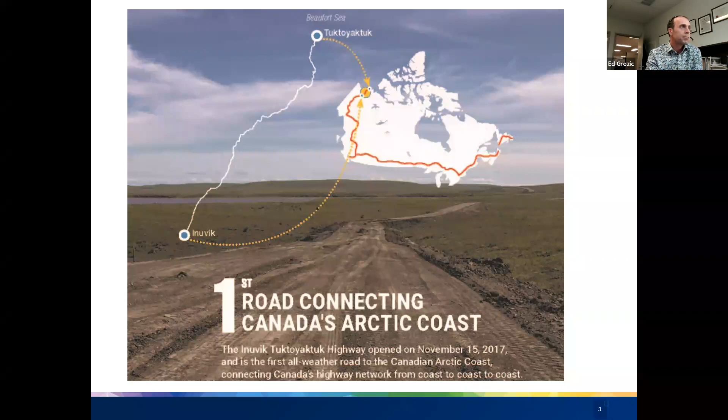Here's an aerial image of the ITH, its location geographically in Canada in the top left, and then the route between Inuvik and Tuktoyaktuk. The owner was GNWT, the contractor was EGT Northwind, and the design team was Tetra Tech and Stantec, through our indigenous partner companies, which is Kiggiak-EBA for Tetra Tech and Kavik Stantec for Stantec.

It was an entire team, dozens of people working on this project for many years. There was no one individual or small group, there were many. It was a negotiated contract, and the owner was pretty clear about their expectations: to construct a resilient, cost-effective gravel road.

They achieved that by engaging local contractors, but our role was to design a resilient, cost-effective road. The materials needed to be local, borrow materials, and materials available in this region between Inuvik and Tuk are pretty limited. Because this part of the world is a continuous permafrost environment, and the tundra is too soft and wet to work on in summer, this work was done between November and April in the winter months, rather than a May to October construction season like we'd have down south.

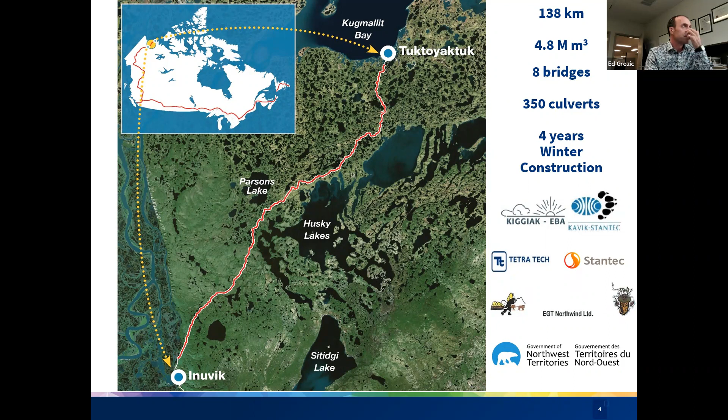In 2009, we undertook a field reconnaissance. I'll walk you through the stages of the project. We went from nothing, no direction, as a design team. We had to identify an alignment that could work for us, that we could construct with. So in the fall of 2009, we undertook a field reconnaissance program. We flew a line, broadly flying a region that Public Works Canada in the 1970s had identified as a possible route between Inuvik and Tuktoyaktuk.

From that, we worked with that routing and refined and re-refined and reworked a route that basically crossed the most favorable terrain conditions available to us, trying to avoid the least favorable permafrost and organic terrain conditions, and to find a routing where we could do a LiDAR survey on a corridor that we could then actually put a geometric alignment to.

There were a bunch of setback distances we had to meet for environmental reasons, setbacks from Husky Lakes, archaeological constraints, all sorts of considerations, and of course finding an alignment close to available borrow material was important as well.

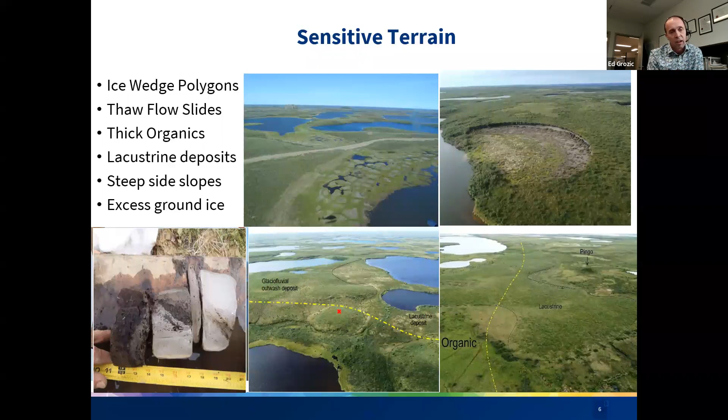Stuff we were trying to stay away from in the field, quite common in periglacial permafrost environments, is the ice wedge polygonal terrain you can see in the top left. This part of the world has retrogressive thaw flow slides, shown in the right image. Lacustrine deposits are pretty widespread near Husky Lakes and close to the Beaufort Sea. We were also trying to stay away from steep side slopes, and from excess ground ice in soils. But in this part of the world there's a lot of excess ground ice in the soils, as we found through investigations, which I'll speak through.

So what's excess ground ice? When I refer to excess ground ice, some people call it ice rich, but it's ground with excess ice. And what does that mean?

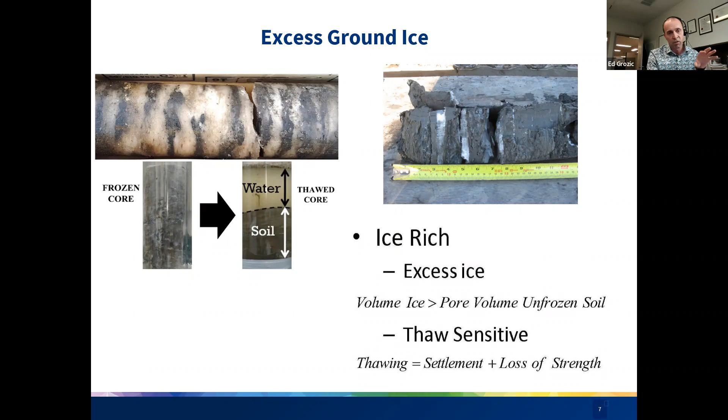Well, when that frozen mass of ice and soil thaws, what happens? The solids separate from the water. This image is just illustrative of what happens in that case. So it's a very thaw-sensitive material. Obviously, when that material becomes saturated or super saturated, there's a loss of shear strength, there's excessive settlements. So the design team in this part of the world worked hard to try to keep this material frozen, since it's strong in a frozen state and very weak in a thawed state.

A bunch of terrain mapping. Once we knew a general route and identified a corridor, then detailed terrain mapping was undertaken, and this took a lot of effort. This detailed terrain mapping was then used to target what we considered the most favorable terrain units for this road alignment that we had to work with, and we also used it to put a geometric alignment on.

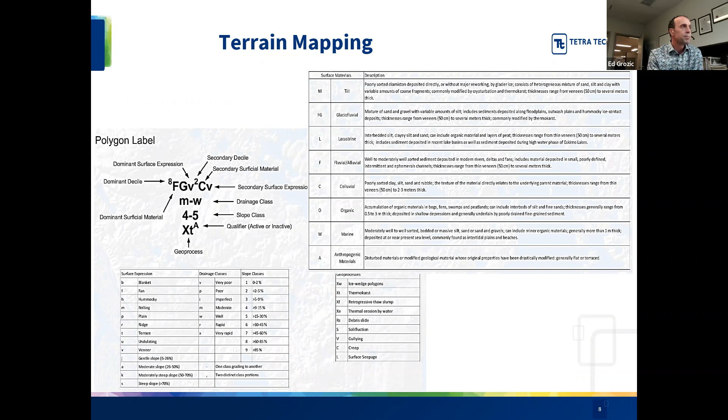But when you put a road geometric alignment down onto that terrain mapping, it didn't always align with the most favorable terrain, and there are certain sections of the road that had to cross unfavorable terrain. We were aware of it, and then we had to design accordingly for it.

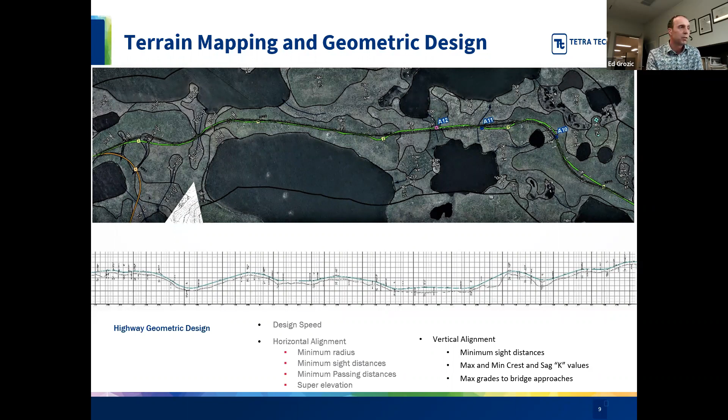Geotechnical investigations were undertaken over 2 winter seasons, and because this is a remote location, there was no communication or connection between Inuvik and Tuktoyaktuk on land. It was formerly via an ice road. This was done between February and March, and just compacted snow roads were used, with nodwells and other track carriers.

Pulling equipment or trailers on sleighs, like you see here, were done. We started in February and March because we started to get a little more daylight hours. Trying to do work in December and January is very difficult, and there are a couple of months there with no real daylight, great daylight hours. So it's more favorable to start a drilling program in February and March, and sometimes occasionally work into April.

Part of the investigation was looking at borrow material, which we knew we needed to construct a road. Almost 5 million cubic meters of material was required to construct the embankment, and no geophysical surveys were done at the time. 10 years later, we'd probably undertake some geophysical surveys, but it was just a detailed conventional drilling program.

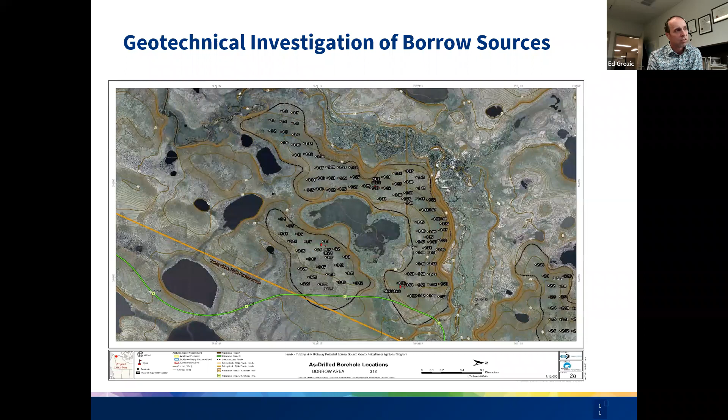We also undertook geotechnical investigations at stream crossings and along the proposed alignment to better understand what the subsurface conditions were, what the ground temperature conditions are, and to better understand the stream crossings, whether we were dealing with talik or what sort of subsurface condition exists.

What we found consistently through these 13 stream crossings is we found consistently a silty clay material, and it was ice rich. The silty clay material was dominantly till from a depositional history environment. It was a till, but it was quite ice rich, and it was fine grained, and most of the crossings encountered that.

From this geotechnical investigation that we collected at the crossings and along the road alignment, we started to develop what I would call soil profiles in support of being able to do thermal analysis. I'm stepping through these different processes, but we had to understand what the subsurface conditions are. We know it's going to be variable along 140 kilometers of road, but we still needed to develop some typical profiles that we can use in thermal analysis and in design, in stability analysis and the other design that still needed to happen.

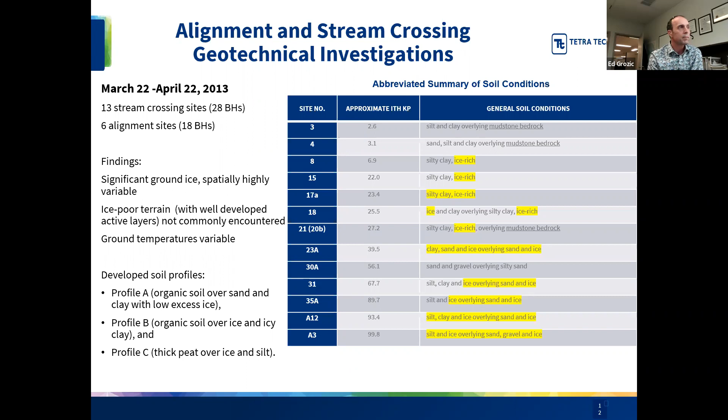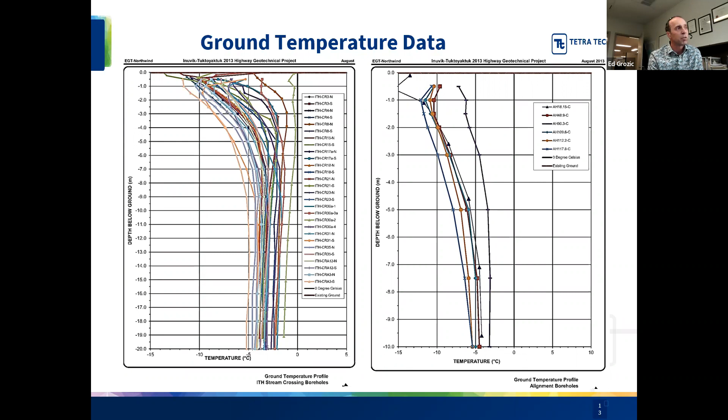The ground temperatures, as you would expect, got colder from south to north. We also collected some ground temperature data along the alignments, separate from the stream crossings, which supported the same finding.

We were mindful of the fact that steepening side slopes would be more favorable in terms of reducing material quantities, while shallowing the side slopes gives a more stable embankment but a larger footprint and greater material quantities. All that work of optimizing the right embankment for the right terrain conditions was still ahead of us.

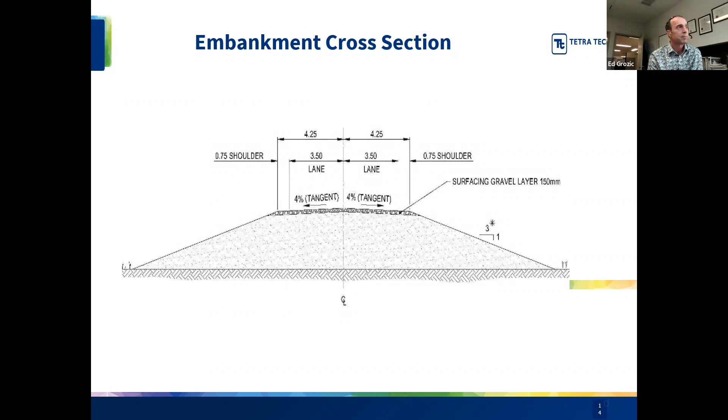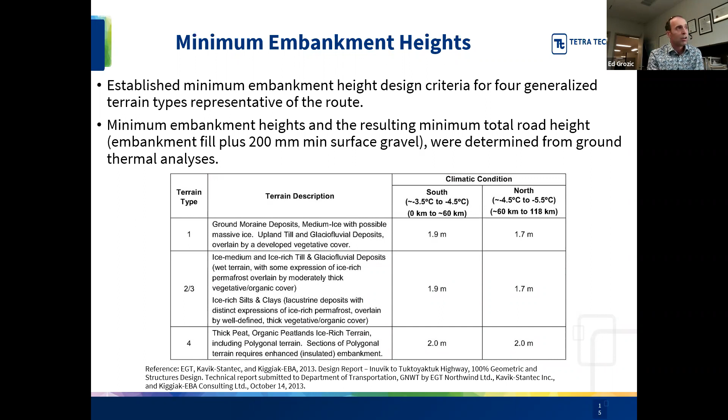Part of the geotechnical design considerations for constructing this embankment was not just the subsurface soil conditions, but also the embankment fills, and the two are interconnected.

So we did some parametric stability analysis looking at embankment fills, not just the height of fills, but height of fills on cross slopes, and how much of a cross slope we could put a road on that would still be stable, and what would be the maximum cross slope we could place the embankment on.

What is the maximum height we could construct? We weren't interested in necessarily maximizing embankment height, because that took more material volume, but geometrically sometimes the road required higher embankments just to get through depressions and deeper areas.

We looked at varied subgrade conditions and how the embankment would perform on these variable subgrade conditions. But if we're able to construct a thick enough embankment and maintain the permafrost at around the original grade, then we assumed the frozen subgrade would be more rigid than the embankment materials itself.

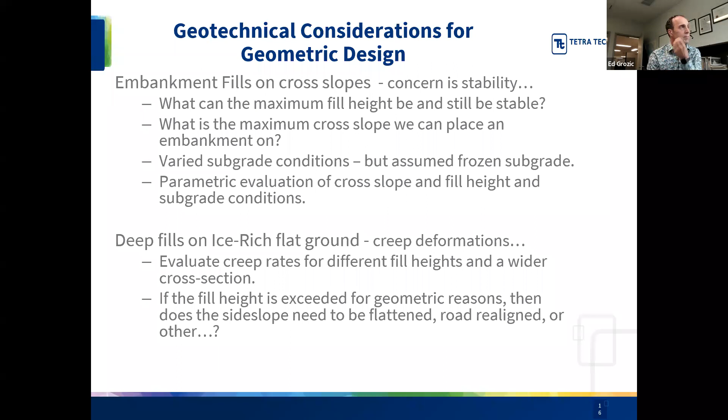Stability analysis was pretty comprehensive and looked at many different scenarios. We were interested in understanding how high of a fill we could construct. We ended up determining that a 5 meter thick fill with 2-to-1 side slopes generally worked from a stability perspective, unless the subsurface conditions were too soft and the strength wasn't there.

With a frozen subgrade, a 5 meter embankment with 2-to-1 or 2.5-to-1 side slopes worked just fine. We did some parametric work to try to steepen up the side slopes to reduce fill quantities, because if fill heights can be reduced, the likelihood of failure decreases and maintenance requirements decrease. Higher fills are just fundamentally more work to construct and maintain.

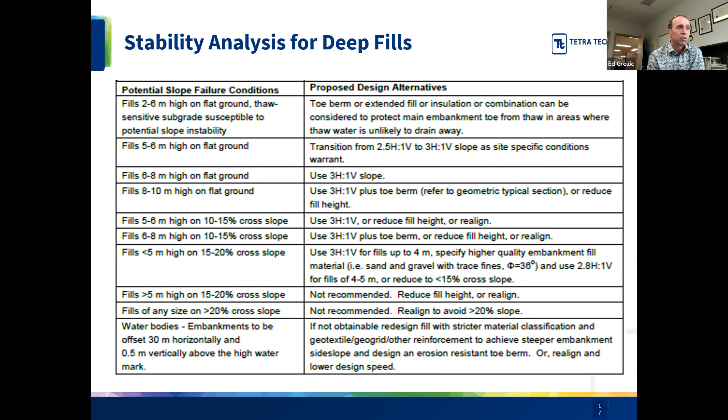The work was done in winter, so everything had to be drill and blast, and then the frozen materials were hauled to the alignment. The material dominantly in this part of the world is a silty, fine to medium grain sand. There was one borrow pit, 312, that had nice sand and gravel, which would be the optimum material for the embankment as a whole, but the haul distances were just too great to go from 312 all the way up to the north end or all the way down south.

So from a construction cost perspective, the road embankment was constructed with generally the closest available material sources. A couple of the sources were only actually accessible in the winter months from lake ice. You can't see it in this image, but PW10 requires crossing the lake between the alignment and the pit, and GSC 4 requires crossing another lake, Jimmy Lake, to get to the pit from the road alignment.

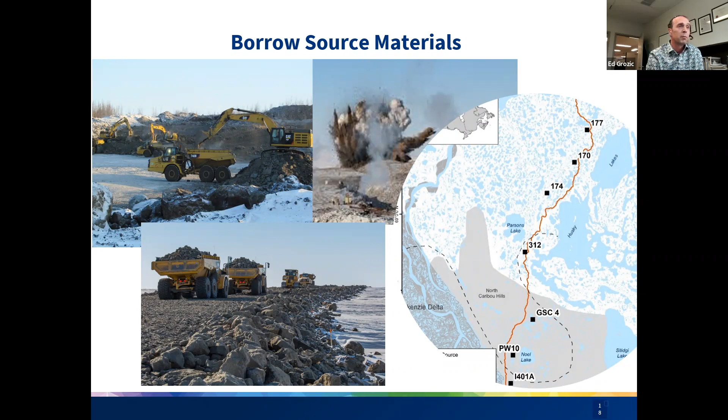Variability of material sources was another challenge. We know what materials ideally we want to work with, but then there's the materials that you have available to you to work with. Every pit was a little bit different in its gradation, and within the pit, there was a bunch of variability.

So for the pits, and for the project as a whole, we had to understand and rationalize what materials we were going to use, and how we were going to undertake quality control in terms of what was acceptable and what was not, in order to give the contractor direction on what they would be permitted and not permitted to do.

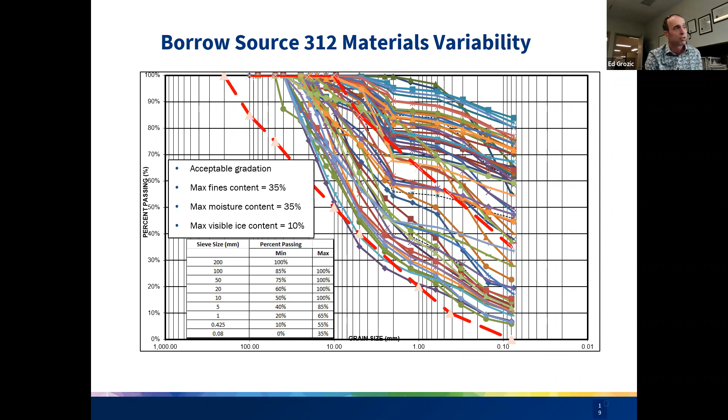There was some good work done in the early 1980s on the compaction of frozen soils by Botz and Haas, through the Cold Regions Research Engineering Laboratory in the US. It's a good special report, and we used it and worked with it because we needed to understand what sort of densities could realistically be achieved under winter construction, and what were the big factors influencing the density you can achieve in winter conditions.

We recognized that earthwork in this job, but on most projects, is a critical part of construction, particularly for winter construction. We understood excavation, and that we could excavate rock in the summer or winter, and that we can drill and blast and excavate frozen soils in the winter. But it's the placement of the soil in a winter environment that's very restrictive and difficult, and that's what we wanted to better understand. We knew that it's not possible to compact to the same density in winter as in summer, which is why conventionally down south we don't place soils in winter freezing conditions, or we hoard material or do some other activity in order to place soil in an unfrozen state.

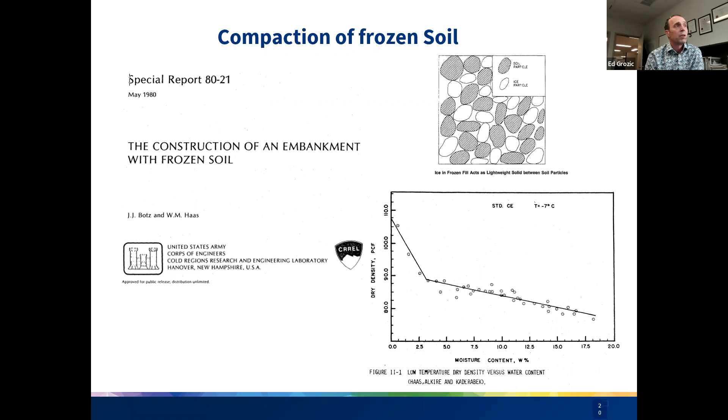In this case, it doesn't show up, but we also placed a non-woven geotextile separator between the embankment fill material and the tundra. Like I said before, all the construction happened in the winter months.

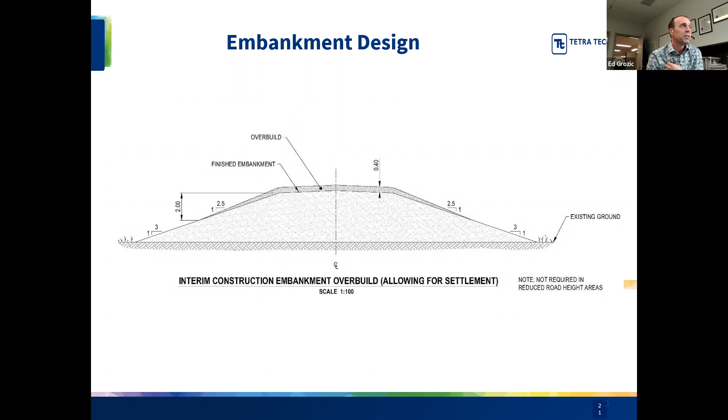Some photos to illustrate the work that happened in the winter months and how we tried to maximize densities in the field with frozen materials. The work done by CRREL and our own work showed that if we took blasted material and placed it in thin lifts, sheared it into place, and further crushed the frozen particles—even though they're ice bonded with ice crystals within the soil—if we're able to shear it in place and compact it...

...with, in this case, a sheep's foot vibratory compactor, 10 ton, we did this in lifts building up. This was the way we were able to achieve the best in-place densities of the embankment, which was of course attractive to us: the higher the density, the less the thaw settlement we were going to get in subsequent years.

This is an example of the material being spread and the sheep's foot roller going back and forth, and of course this is the pattern. Everything was passed with a minimum of 4 passes. Lifts were started at a maximum 40 centimeter thickness and then packed down.

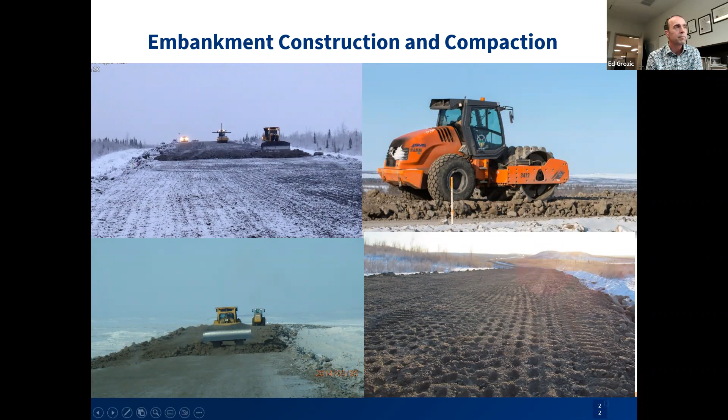In 2017-18, we were working with the GNWT to understand how much compaction and settlement we were going to get, and how much material we were going to use. The GNWT was interested in understanding volumes and costs, and also in doing some density testing of frozen soils. This work was actually done through the University of Calgary in 2017-2018 by 2 students. GNWT provided funding to the U of C to study the behavior of compacted frozen soils obtained from the ITH.

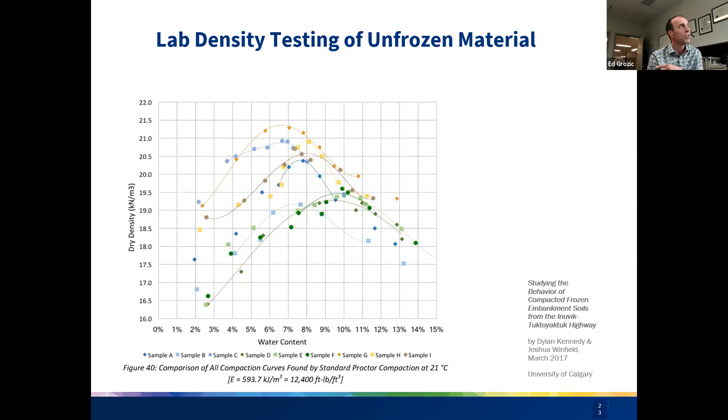We needed to understand how much loss in density occurs when you start introducing more moisture in the form of ice in the material. This work builds on the work that CRREL did in the 1980s, so we weren't doing anything novel here. We were just reproducing the work they had produced in the 80s.

We realized that even with further testing in the field, at optimum moisture content we were only able to get about 70 to 80% of the maximum dry density of that frozen material, which then supported the 40 centimeter overbuild that we estimated would be needed for the highway.

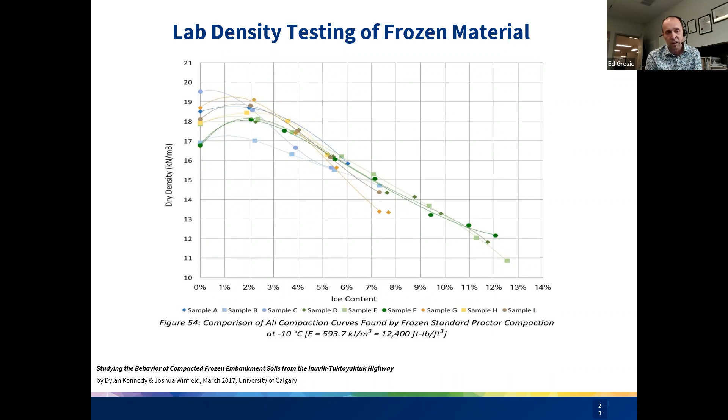At the end of the day, after 140 kilometers of highway were constructed, in some places the overbuild was sufficient, and in other places it was insufficient, meaning more settlement occurred, probably because either the moisture contents were higher or the in-place frozen densities were lower, a variety of factors.

There were different options that were looked at. Is it possible to mix concrete from a batch plant locally? Was that cost prohibitive? Is it more effective, which is what was done here, to just precast the concrete and ship it to site? So those different cost scenarios were evaluated.

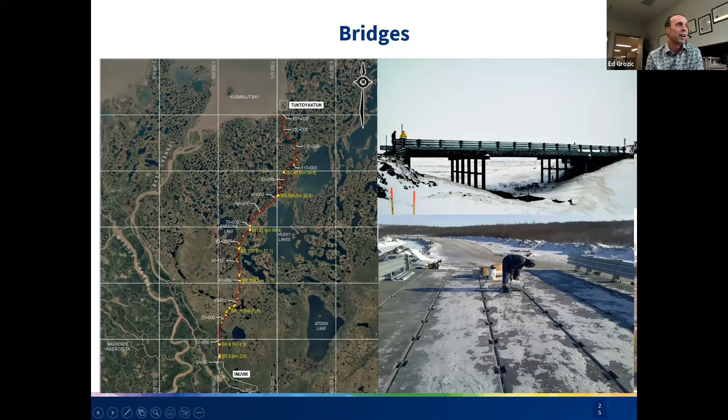The bridges are all precast concrete bridges, but they're all on piles. The piles are the unique portion I wanted to speak about, something maybe not everyone on the call would recognize.

These ones in the photo are all 356 millimeter diameter piles. They go 12 to 18 meters below grade, and they're all what we consider steel pipe adfreeze piles. I'll get to what we mean by adfreeze piles shortly.

You can see here, and I'll speak to these later, access tubes installed behind the piles. They were spaced about 1.9 meters apart and about 1.2 meters behind the piles. These access tubes were placed now because we wouldn't be able to get access under the bridge deck to drill these holes after the fact, which would then provide us the opportunity to do thermal ground cooling intervention if we needed to in the future.

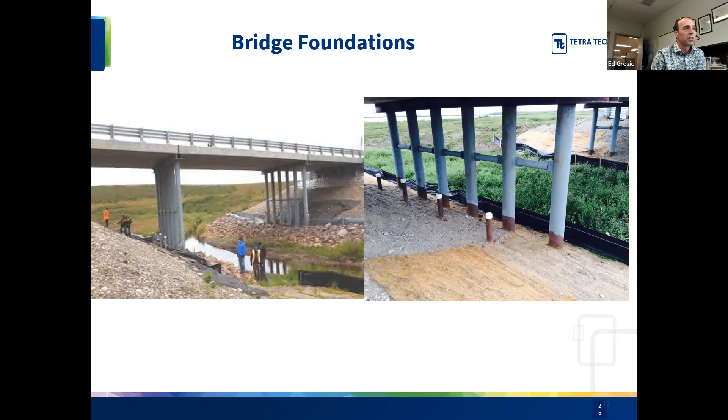So what's an adfreeze steel pipe pile? They're commonly used in the Arctic and well suited for relatively light loads. They're common in communities. An adfreeze pile is constructed in permafrost by drilling an oversized hole, inserting a steel pipe pile, and backfilling the annulus and the inside of the pile with a saturated granular backfill, which freezes following installation.

It takes time to freeze back, and I'll explain that. The pile then derives its capacity from the bond between the pile and the frozen backfill and the adjacent soil.

Primary design inputs are ground temperature and pore water salinity, or the chemistry of the soil, and then the loading conditions, short or long-term. The diameter of the pile influences its capacity, so capacity is dependent on the configuration of the pile, its diameter, the nature of the load being applied, and the characteristics of the permafrost - is there salinity to it, some other chemistry, what are the permafrost conditions?

These piles, and anything under load on ice, creep, and so these piles creep as well. But the design accepts an allowable creep settlement for the life of the structure of these bridges, and we assumed a creep rate of 1 millimeter per year. Adfreeze steel pipe piles are designed to perform in a range of secondary creep, so that rate of settlement stays constant over time, which is important. You don't want to get into that tertiary realm, and so that's what was designed here.

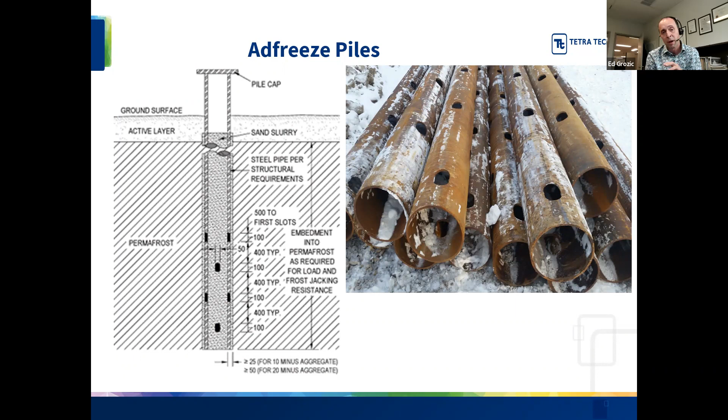We also know that ice and permafrost has got higher resistance to short-term loads rather than long-term sustained loads. But these bridges weren't that heavy - the traffic live loads were proportionally high to the overall traffic. So the short-term duration of the load events was considered to justify the high capacities for the piles for traffic loading. The vehicle is a dynamic load that travels over the bridge, and even though that vehicle can be heavy, it's happening in a dynamic short-term fashion, so those piles are able to resist that load.

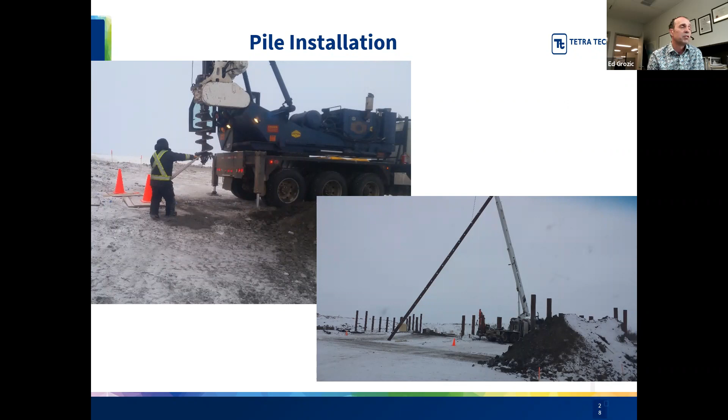How are these piles installed? A conventional piling rig, like you see on the image to the left. If the pile is 14 inches in diameter or 356 millimeters, then it ends up being an 18 or 20-inch hole, 450 or 500 millimeter diameter hole. Once the hole is bored, here's an example of an 18-meter long steel pipe pile that is going to get lowered down the hole.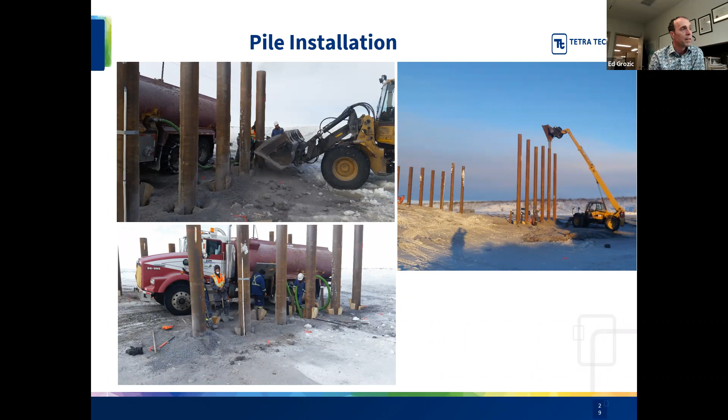The water is shown in this photo - it's a water truck. The water is warm, we try to keep it as cold as we can, but inevitably it ends up being 5, 7, 8 degrees, so it is warmer than the permafrost. We put it down the hole, it warms the ground in the short term, and then we have to wait for freeze back to occur. Freeze back of a steel pipe pile can take about a week, depending on how much water and how hot the water was down the hole, and what the native ground temperatures are. Here's an example of just monitoring freeze back.

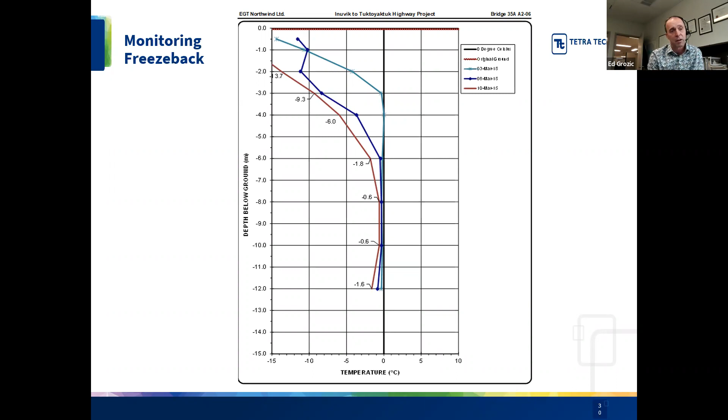At time 0, everything is at the 0 isotherm, and after 5 days it's cooling like this, but the mid portion here is still close to 0, just barely frozen, and a day later it's getting colder. Once we achieve about -1 as a temperature profile, then the pile is good to start loading. We don't load the piles until we have to, so the longer we can wait, and the colder the piles can get and equilibrate back to the natural ground temperatures, the better.

Temperature instrumentation sites along the way - there's a bunch of sites, I'll go through these fairly quick. The government is keenly interested in monitoring ground temperatures across the entire alignment at the bridge crossings. All the piers and all the abutments are instrumented for ground temperature, with several locations along the highway as well. The Northwest Territories Geological Survey also have a bunch of instrumentation along riparian zones along the highway.

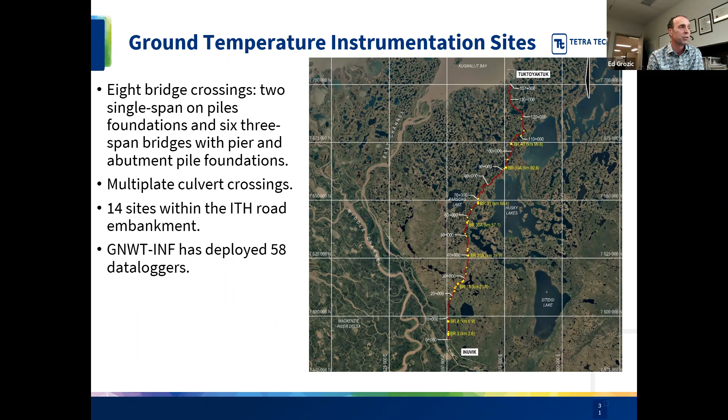I'll show you two images of ground temperature over time. This is one within the embankment, and over the period of four years - this is a 2.4 meter thick embankment - we're seeing warming penetrating below what is identified here as the original ground. But we don't know in this case, so we're showing warming here. This section of the embankment is performing well, but we haven't investigated yet whether this warming is just due to settlement of the embankment - is the embankment not 2.4 meters thick now as it was constructed in 2017, which is likely the case? The embankment is going to settle about 20%, so really, even though it's showing thaw penetration into the original ground, this 0 degree temperature is probably pretty close to the original ground.

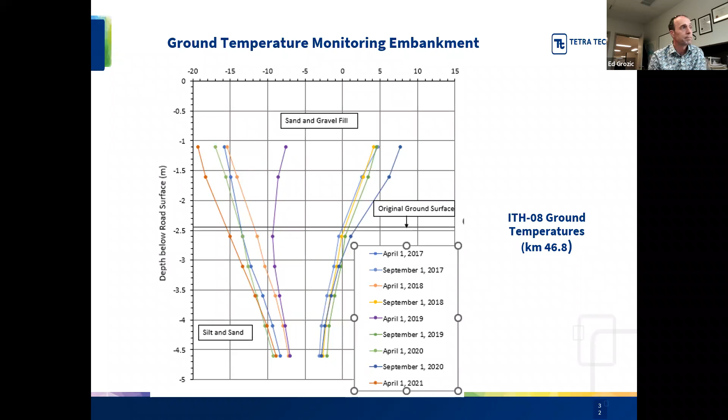At bridge crossings, I'll wrap up here. All the abutments and all the piers are monitored. Ground temperatures are cold, and we want the colder the ground temperature, since that gives the higher capacity of the adfreeze steel pipe piles. This is an example of just one crossing, anomalous to the entire project, where we're seeing warm temperatures.

In the upper portion of the pile, which is suggestive to us, this area is being investigated. It's called Hans Creek, Bridge Crossing 30A, where there might be a talik here that wasn't picked up during the geotechnical investigation, since these sites weren't drilled at the exact locations of these piers. This bit of warming from a talik compromises the strength and capacity of the pile.

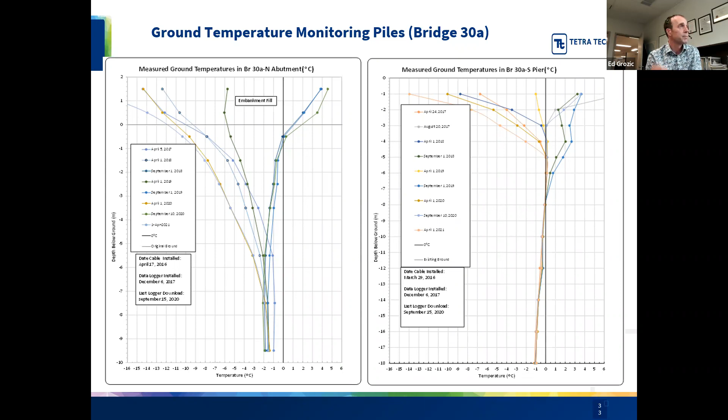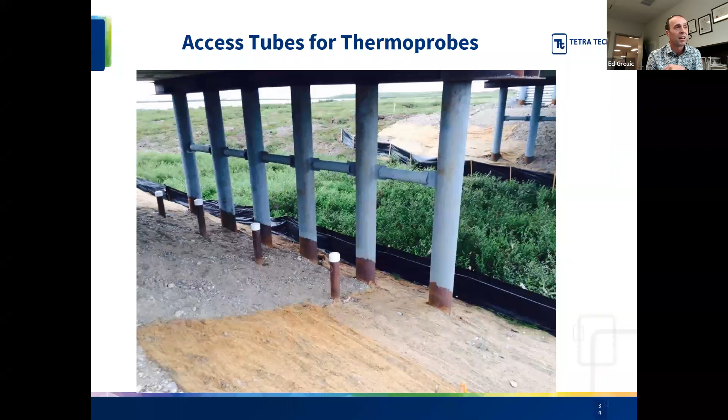I'll get back to the thermal tubes really quick. Like I mentioned, they're intended to be used if ground cooling intervention is required down the road. They weren't installed day one because it would come at a cost, but these caps could be removed and thermal probes placed down these tubes, and then thermal siphons could be connected to them.

So what's a thermosyphon for those that may not be aware? In short, a thermosyphon is a passive cooling device that operates on a principle of convection through vaporization and condensation. A sealed thermal siphon contains pressurized carbon dioxide, partially in gas and liquid phase. When the air temperature is colder than the ground, heat is extracted from the ground through vaporization of the carbon dioxide in the evaporator section, which is here.

Then it rises up into the radiator section, the upper portion of the thermal siphon, which is exposed to the cold ambient air atmosphere. This causes the gas to condense into a liquid, and as a liquid it returns back to the bottom of the thermal siphon, setting up this circulation. This heat transfer occurs in the low end of the unit, where it's warmer.

The heat transfer and exchange occurs when the ground is warmer than the colder air outside. So these passive systems only operate in the winter months, not the summer months. The ground has to be warmer for this phase change to occur, and the ambient air temperature has to be colder than the ground. So passive thermal siphons work in the winter months.

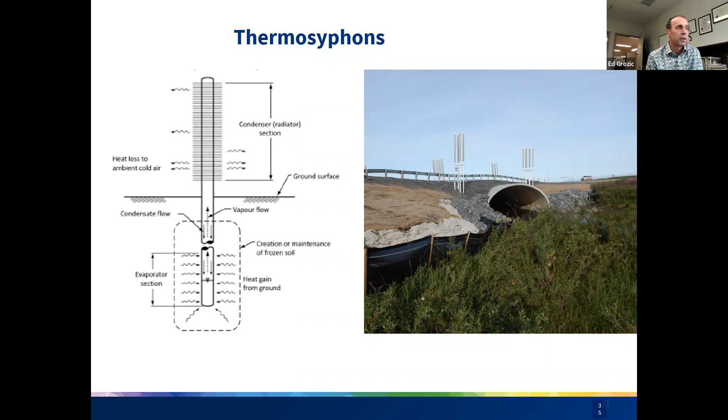Thermosyphons are a proprietary technology, and the company is Arctic Foundations. Arctic Foundations of Canada is who we use. Arctic Foundations has an American company as well, in Alaska.

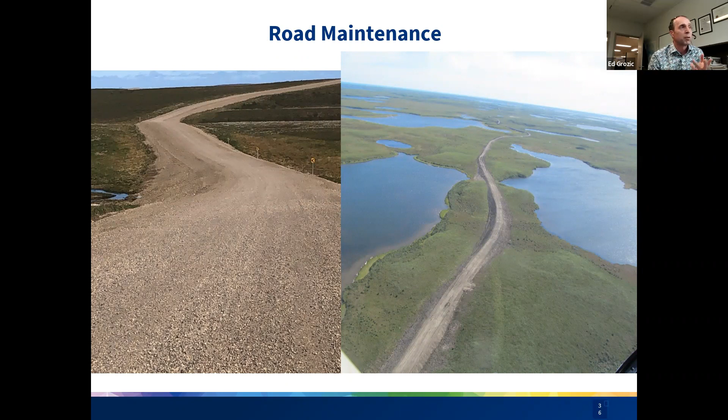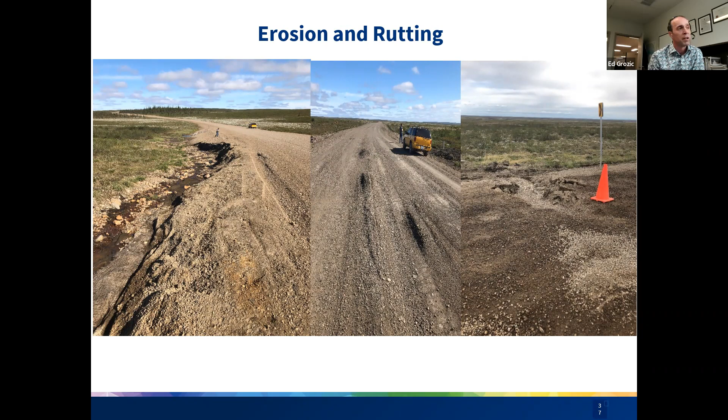Really briefly, I'll speak about road maintenance. Any new road requires maintenance, and I'll show you some photos. This is the gravel surface. You can see that in years 1 and 2, there's going to be some instability, some softening of the embankment, a little bit of rutting, and water and erosion along the edge of the embankment. These things are identified, and then they're handled through the maintenance and operation of the road.

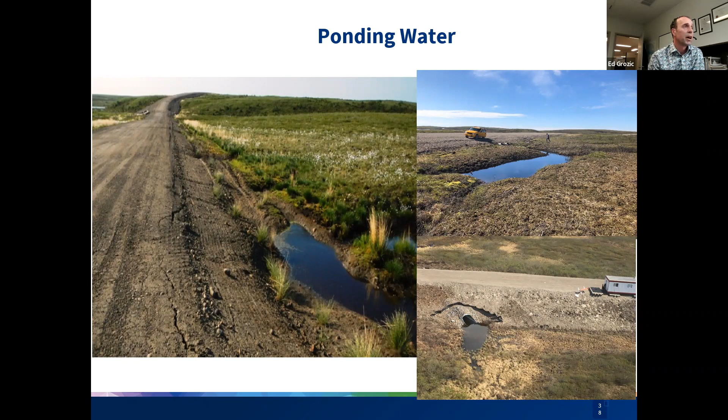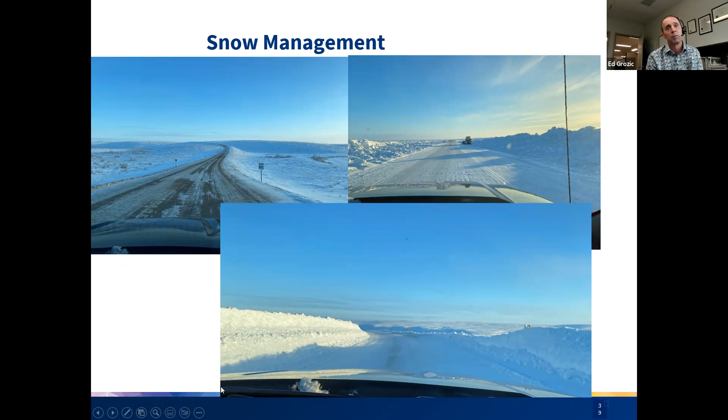Takeaways really quick. Winter embankment construction is feasible. Terrain and material variability is not entirely accounted for in the design, nor really could it be. Even though we did all the terrain mapping and geotechnical investigations, you can't pick up every permutation. Borrow sites can be effectively developed in the winter, we've known that, and others develop in the winter. Winter compaction has its limitations, so you have to account for it in design. And then design needs to be resilient, but you also need to design for adaptability. Newly constructed roads, like any new piece of infrastructure, will require maintenance. And unforeseen conditions will arise inevitably, and we just need to be prepared to adapt to those conditions when they arise.